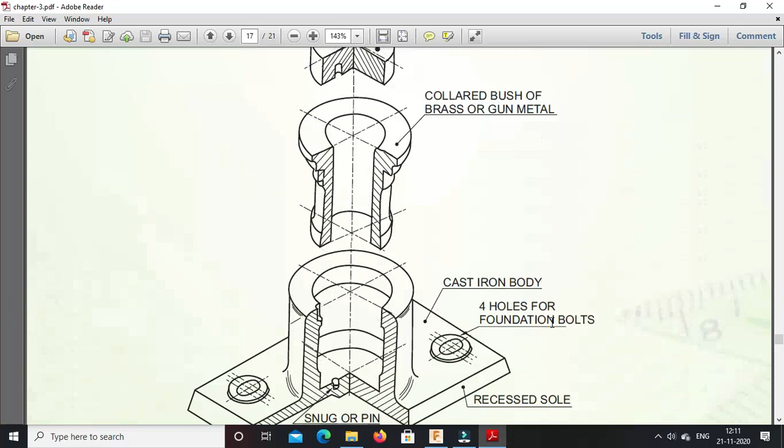So this is the assembly or parts of the footstep bearing. Now in this, if you observe all the parts, this one is the shaft. Generally this shaft will have rotational motion around its vertical axis. So this shaft will be rotating clockwise or anti-clockwise about its vertical axis, and this shaft will also have some axial load. That means this shaft will have axial thrust along its axis.

Now in order to support this shaft, this bearing is used. Okay, so this first part, this second part and this third part are parts of the bearing, and this shaft will be inserted into this bearing for support. Whenever the assembly is carried out, all these three parts will be assembled together to form a bearing, and then this shaft will be inserted into this bearing for support.

Now, how the assembly will look: this part is called the base plate, or body of the bearing. Into this body, the second part, which is called a bush, will get fitted, and finally there is one pad or disc. This disc or pad will get fitted in between this body and bush. And finally the shaft will be inserted. The shaft will be rotating, the bottom of this shaft will be resting on this pad, and the rotational motion will be supported by the bush.

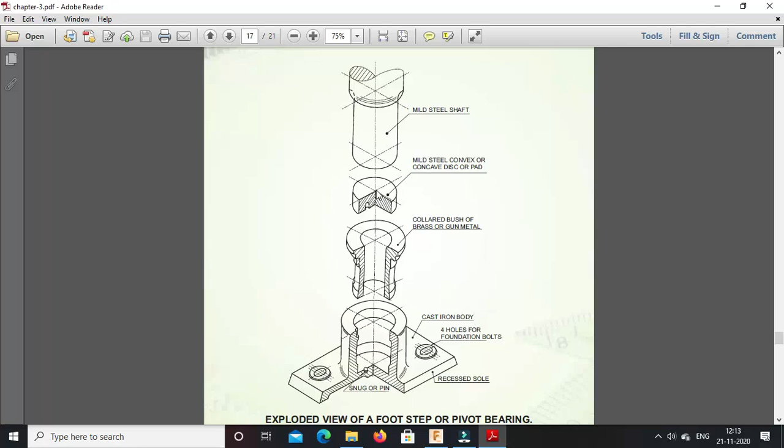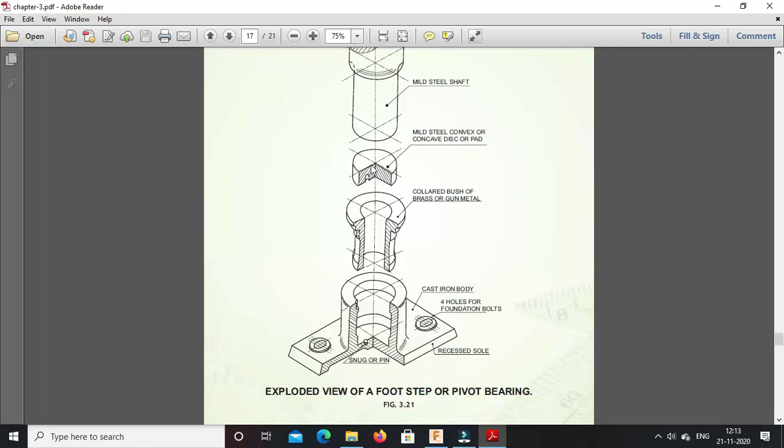If you observe the assembly, there is one small arrangement. Whenever the end of this shaft rests on the disc, in order to prevent rotation of the disc, one small arrangement is made to connect this pad with the body. Okay, so I will try to zoom in. If you observe, one small hole is provided in this pad, and in the body a similar small hole is provided, which is called a snug or pin inside the body.

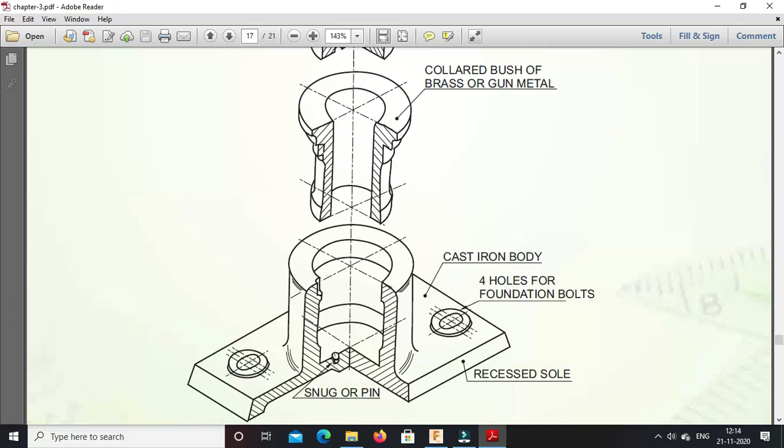So whenever this pad and body are assembled, that means this pad is placed in this body, one small cylindrical pin will be used, with half of that pin inside the body and half in the disc. So it will join them together and prevent the rotation of this pad along with the shaft.

Now if you observe the assembly, this is the assembly. Whenever all parts are combined together, the assembly will look like this. So this is the shaft. This hatched portion is the sectional view of the bush. Then this half portion is the disc or pad that I have explained. Then this pin or snug will be used to join that pad with the body in order to prevent its rotation, and this is the body.

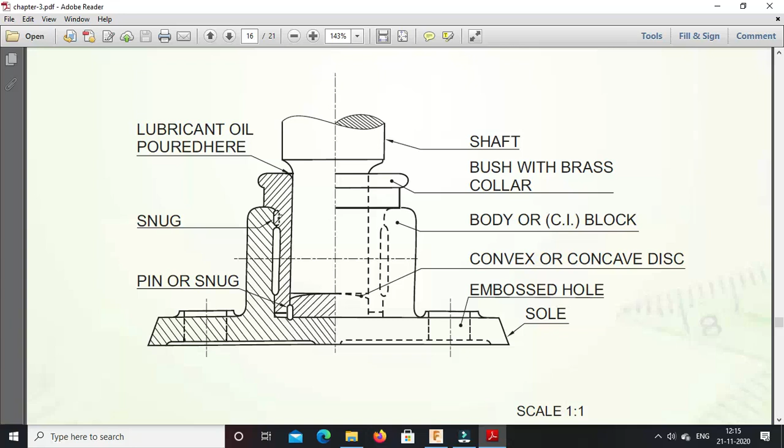Now one more small snug is provided, which is like a keyway. One extension will be provided on this bush. This is the bush, so one extension will be provided on this bush, and similar to a keyway, one small arrangement will be made in this body. So again I will try to zoom in.

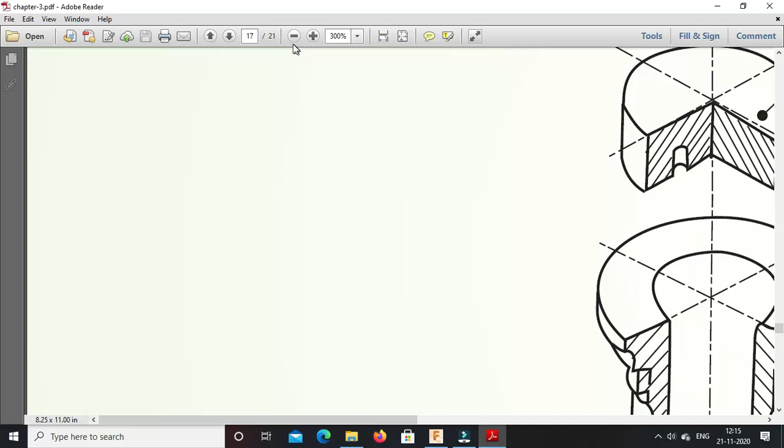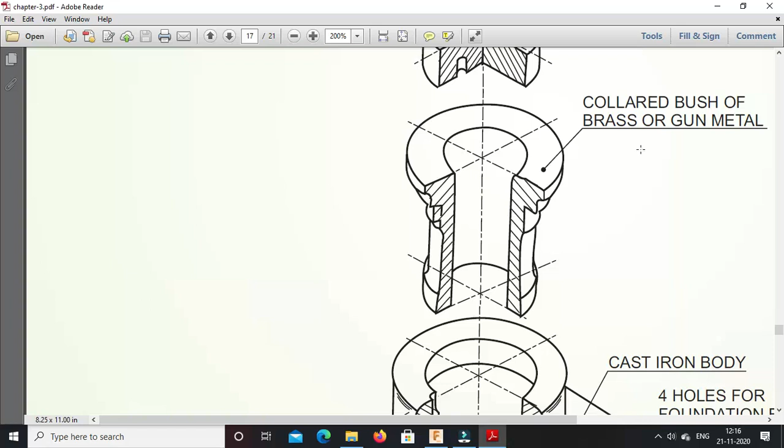If you observe here, there is one small keyway-like hole in this body, and if you observe carefully, this is a sectional part and this is also a sectional part, but there is one additional part here. The curve is like this and the same curve is like this, but this small portion is the extension. So it is similar to a key. This extension provided on the bush will fit into this cavity drilled inside the body, and it will prevent rotation of the bush along with the shaft. So these are the parts of the footstep bearing.

Now I will show you the individual part drawings for the footstep bearing. So this is the part drawing for all the parts.

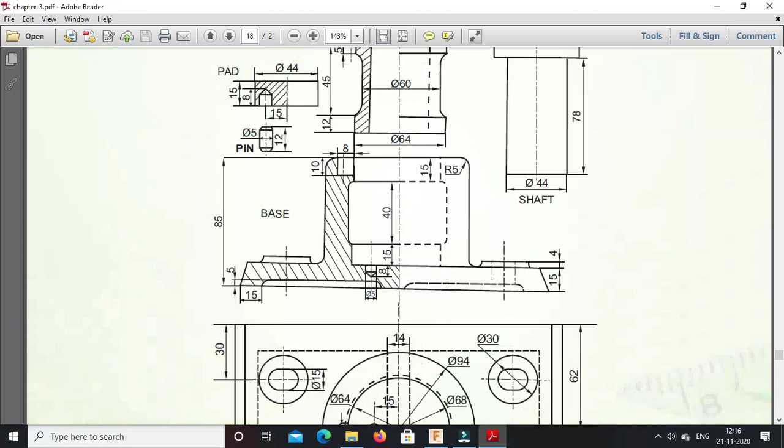Now the first main part is the body. So this one is the body; half part is sectional and the remaining is the regular front view. Then this is the top view for the body; different dimensions are given. Then this part is the bush, the central part, so half part is again a sectional view.

Then this one is the disc or pad. Then another part, which is the pin, which is used to connect this pad along with the body, and the last part is the shaft. So we will try to prepare these actual 3D parts on Fusion 360 software. So we'll go to Fusion 360 software.

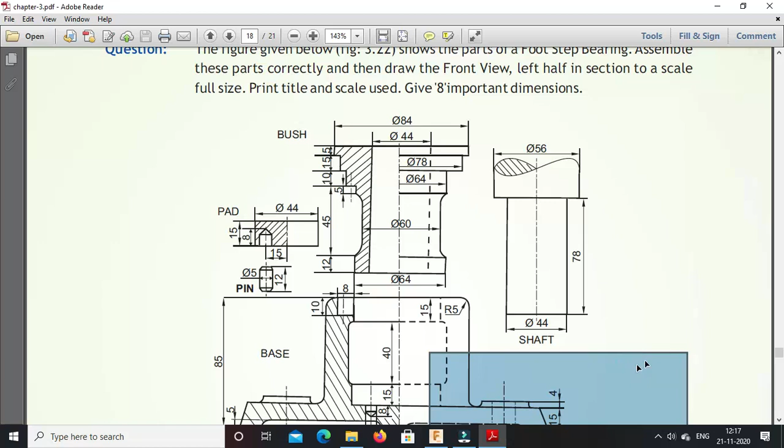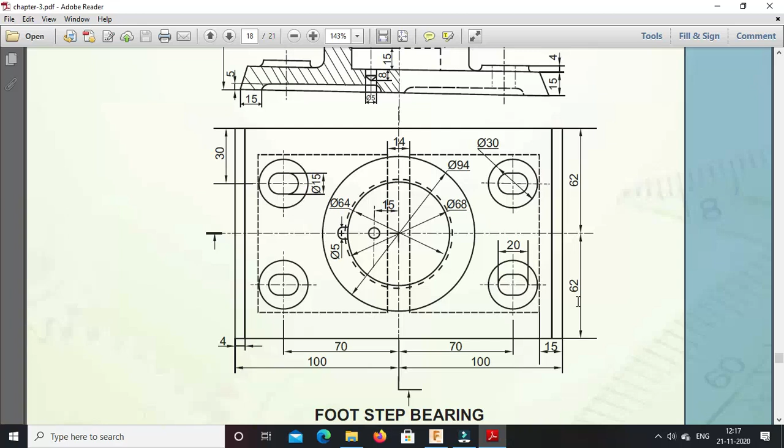Now we will start with the body. If you observe the body, initially at the base there is a rectangular plate. Total length is 100 plus 100, 200, and this is 62, and on the other side also 62. So first we need to create one rectangular plate of length 200, width 124 mm, and height 15.

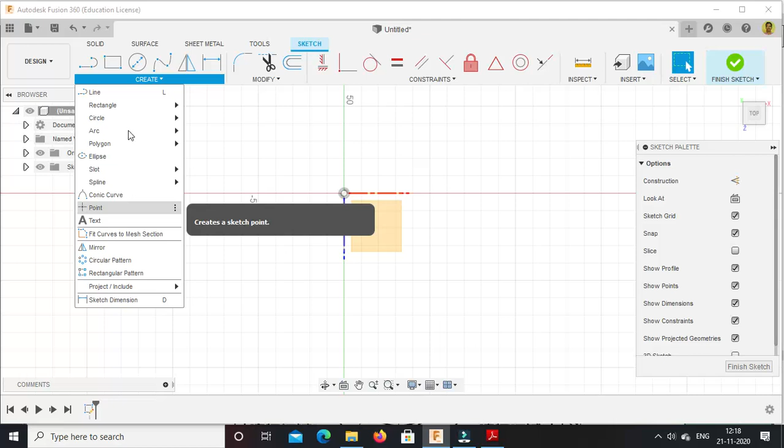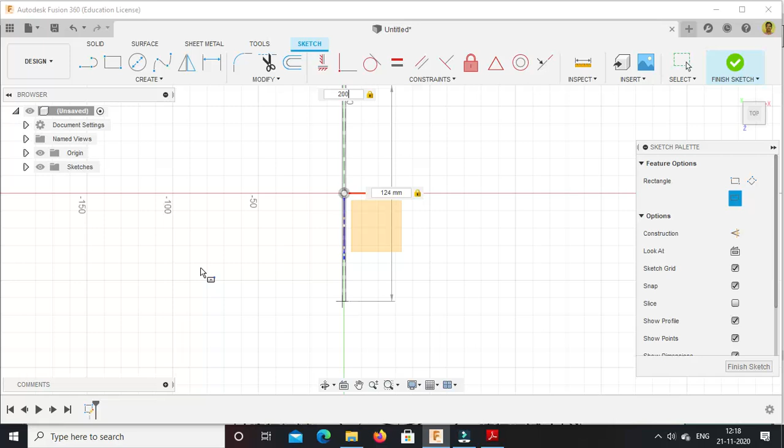Now the plate is horizontal as per the orientation, so we will select this plane, right click on it, go to create sketch mode. Now select the center rectangle option for drawing a rectangle. Center rectangle, select this center, drag it, width is 124, press tab, length is 200, press enter, finish the sketch mode.

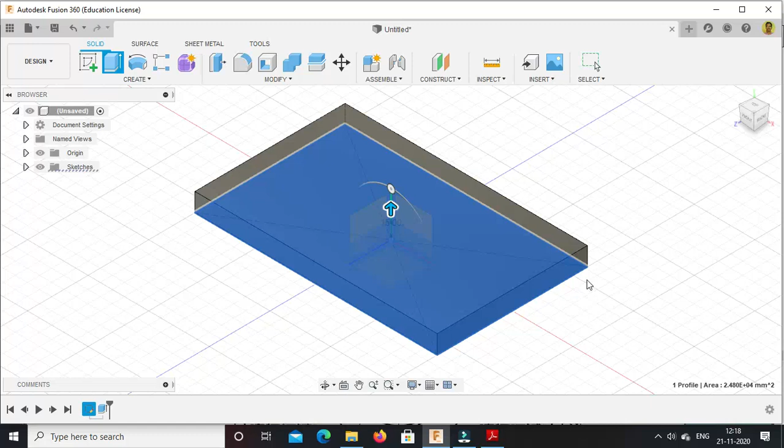Now extrude this in order to create a plate. Height is how much? 15 mm. Press enter. So this base plate is created. Now next we want to,

if you observe, this much portion is removed from the base. The thickness of this is 5 mm, and the width from this side is 15. These are minute details, so I will not go with the exact dimensions. I will show you how to prepare this. From the bottom side of this plate some material is removed, thickness for which is 5 mm. So I will show you how to create that on Fusion 360.

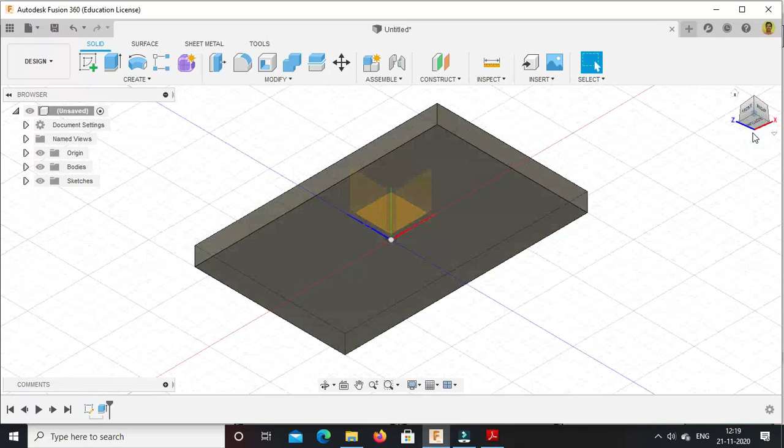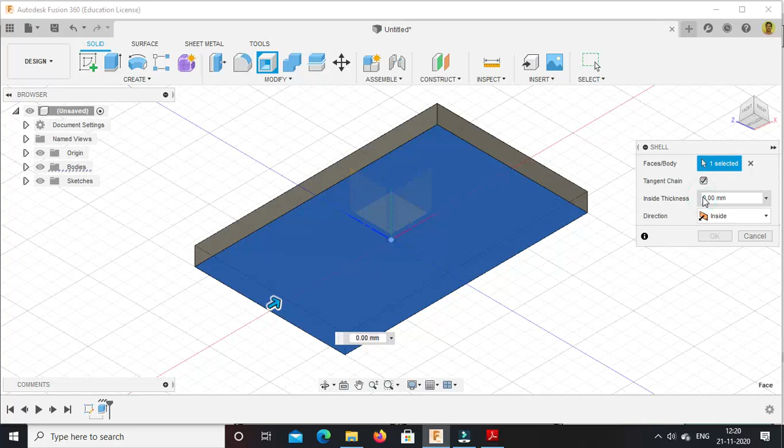You can create it using the extrude cut option also, but I will show you another option. Go to modify, go to the shell command. Now select this face and enter the thickness. Suppose the total thickness of the plate is 15 mm. So enter 10 here, and we will get the remaining 5 as thickness. Direction is inside, so keep it as it is.

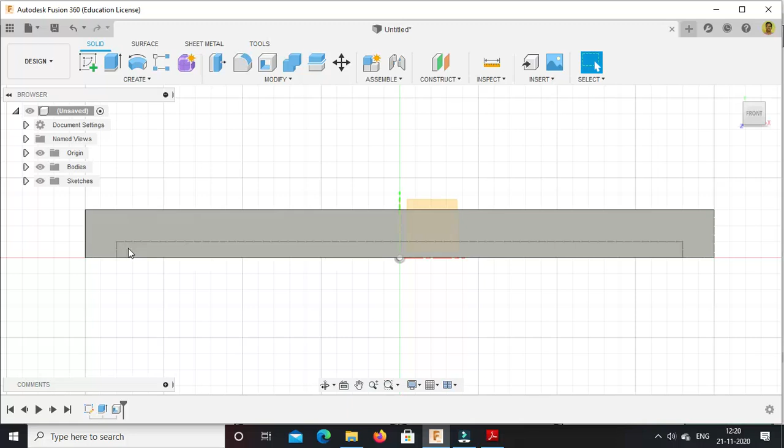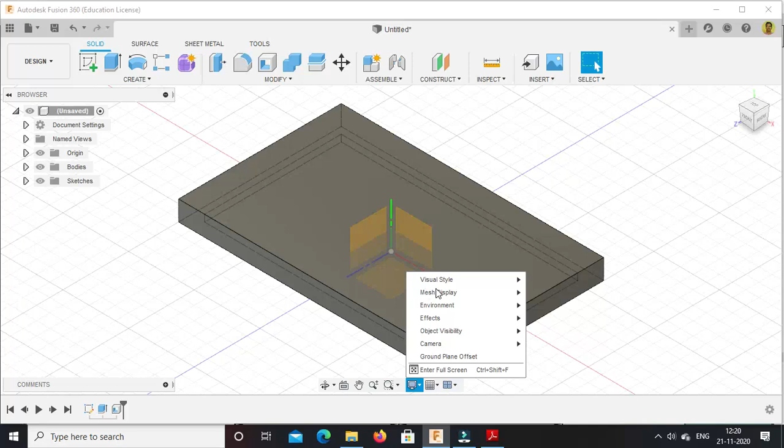Press OK. So now if you observe, this much material from the base of this plate is removed, or a cavity is made below it. Now I will change how to visualize this plate. Visual style is over here, shaded with visible edges only. Now if you observe, some small portion is removed, so that's why this step appears.

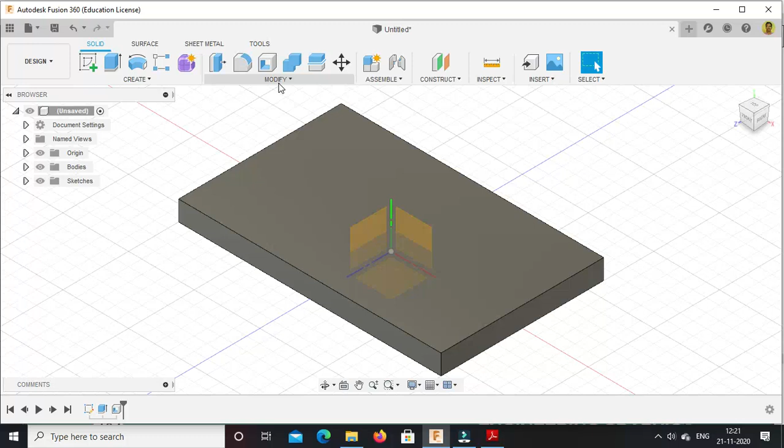Now again, if you observe the base plate, the thickness of the plate is not constant; these edges are different. In order to create this, we can provide a draft. I will show you how to use the draft option. Here the thickness is given as 4 mm as per the requirement, but I will show you how to provide draft. Go to the draft option in modify.

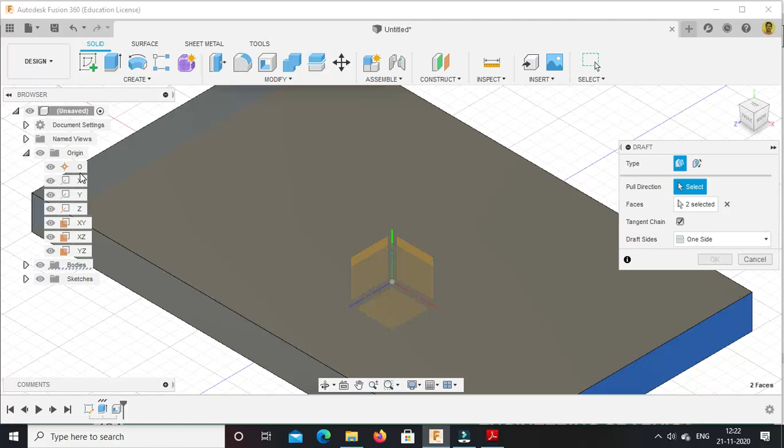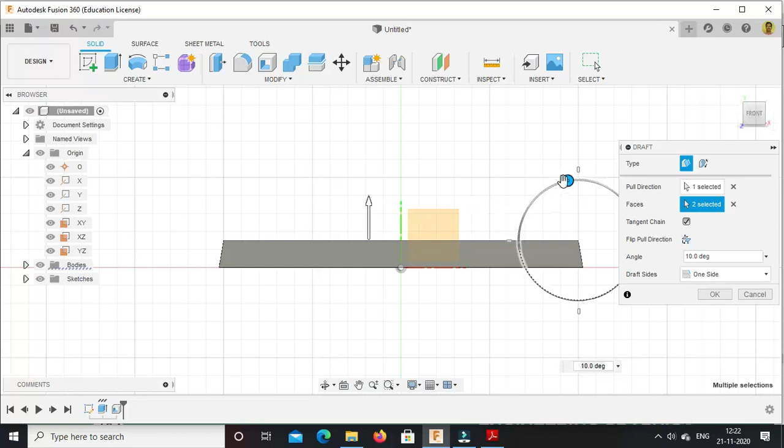Now select the faces. This one, press Ctrl, select the other face also. Now for pull direction, select this vertical direction and give the angle. Instead of giving actual dimensions I am giving some arbitrary value because it is a minute detail. I think this much is sufficient. Press OK. So this is the angle, and the draft is provided on this plate.

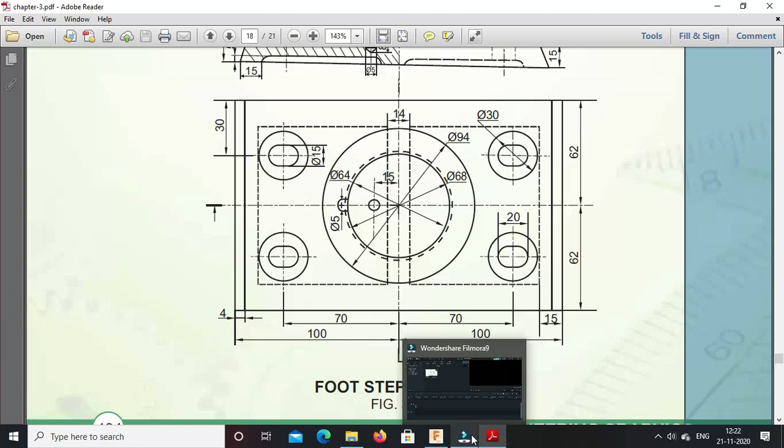Now, sorry, next we want to prepare this central cylindrical portion. If you observe the isometric view, there is one cylindrical portion; the outside thickness is constant, but the inside diameter is not constant. Here it is this much, then it increases, then again it reduces.

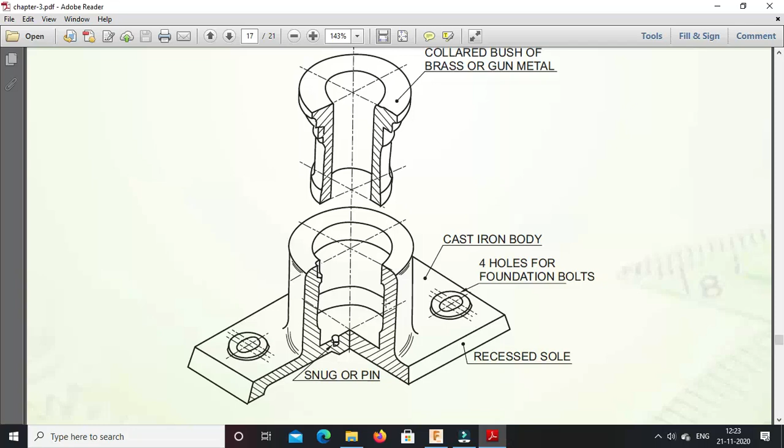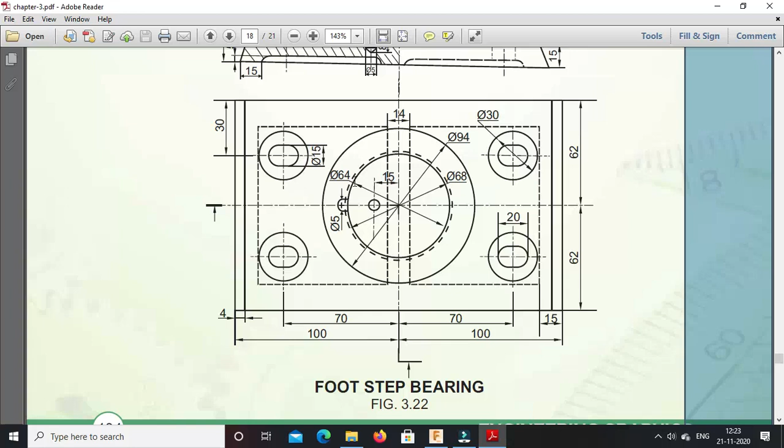If you observe the actual dimensions, initially the outside diameter is 94 and the inside diameter is 68 and 64. So in between the diameter is 68, that means this large diameter is 68 and this diameter is 64.

Now in order to prepare this shape, either you can draw this cross section, whatever hatch portion you are observing, and revolve it using the revolve option, or you can use 3 steps using the extrude feature in order to create each cross section. So I will show you for simplicity how to use the extrude option.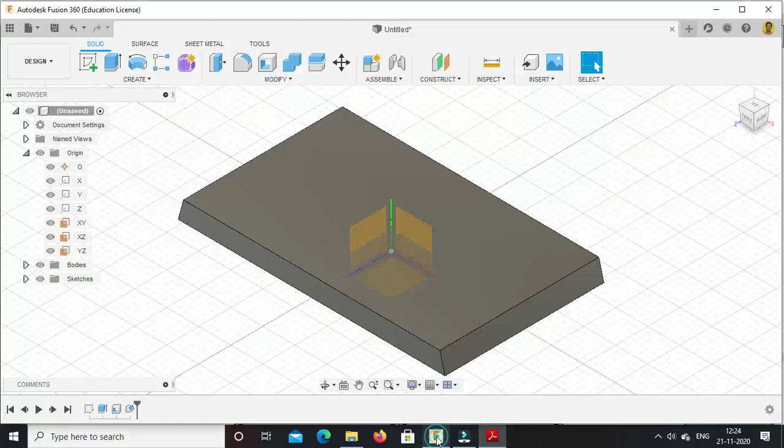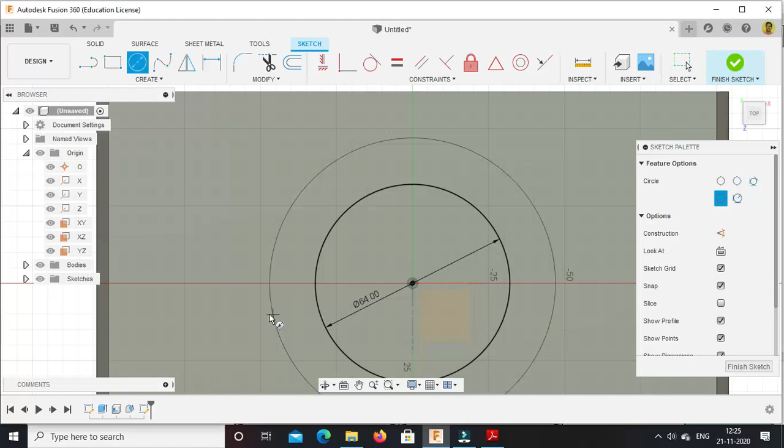Okay, so inside diameter is initially 64, then outside diameter is 94 and this thickness is 15. Okay, so again use this face, go to create sketch option, select center diameter circle as option, select this center point, draw a circle of diameter 64 mm, press enter. Again center diameter circle, diameter as 94, press enter, finish this sketch mode.

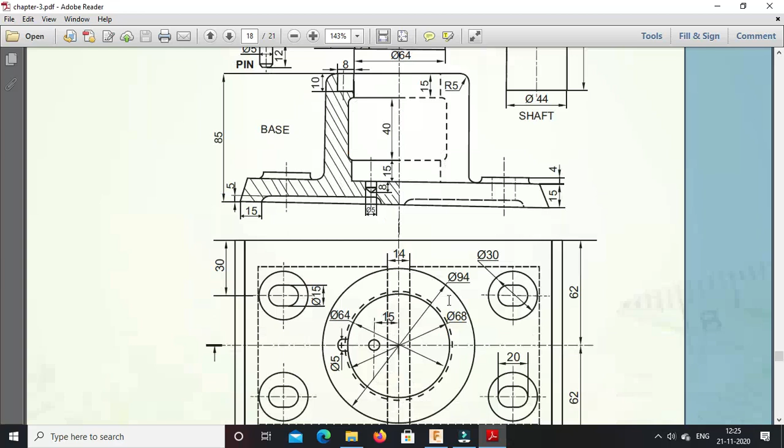Now using the extrude option, distance as 15 mm, press enter. Okay, so the initial portion we have created. Now the next portion is this much, that means the diameter is increasing now to 68 and the outside diameter is constant, that is 94, and height is 40. Okay, so 68 inside diameter, outside 94 and height is 40.

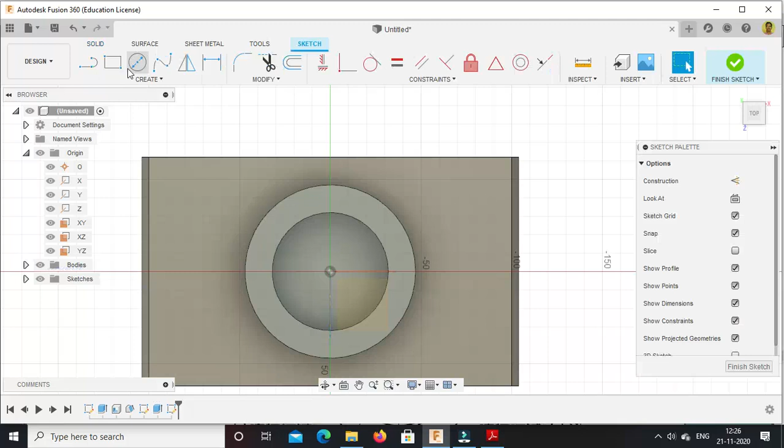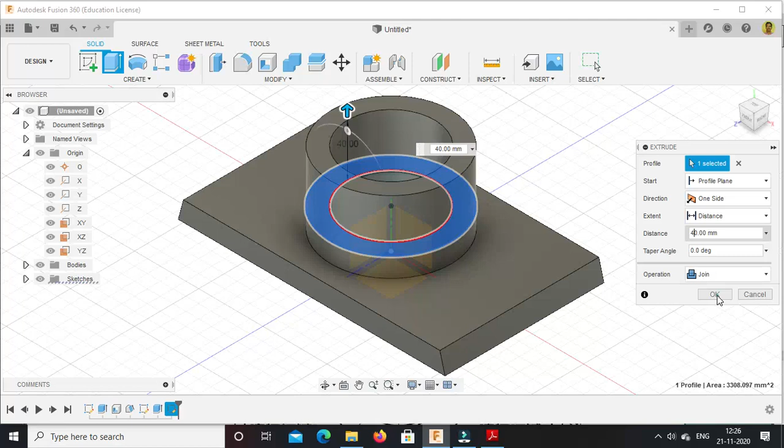Okay, so again we will select this plane or this face, go to create sketch, again repeat the same circle, only the dimension is changing, 68, press enter. Or directly you can finish this sketch, extrude, this distance is 40, press enter. Okay.

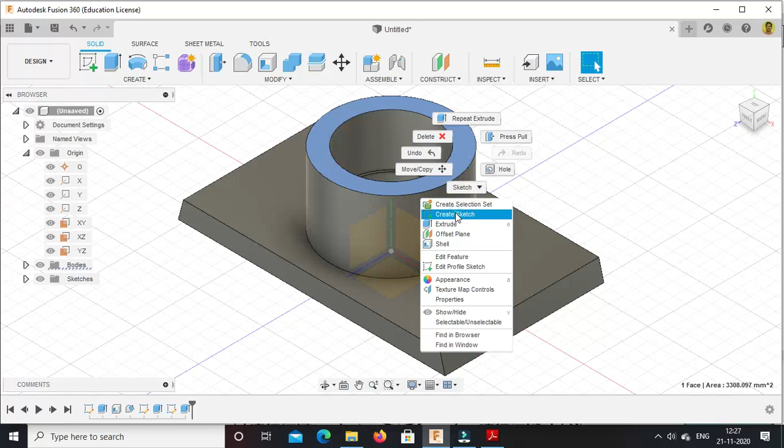Now the last portion is, again the diameter is now 64 and the remaining height is 15. Okay, and the outside diameter is constant as 94. Okay, so 64, 94 and height is 15. Press enter. Again you need to draw 94, enter. Finish this sketch mode.

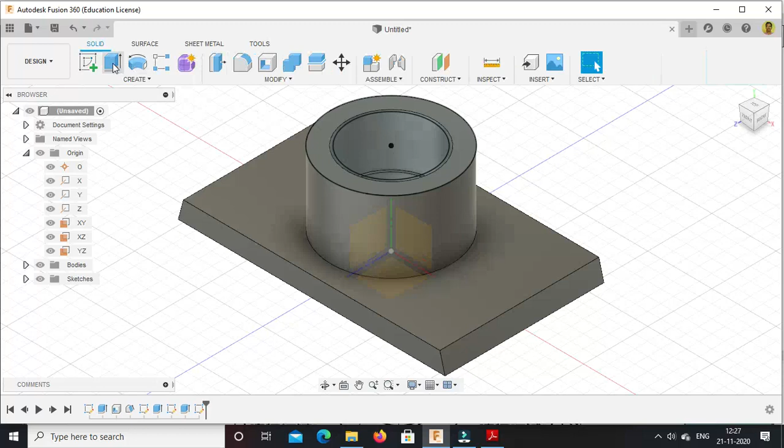Now while using the extrude option, make sure that you are selecting both the portions, outside and inside, otherwise the inside diameter will remain as 68 only. Give your distance as 15 mm. Press enter. Okay, so if you observe, I will show you using this option again, visual style I will change.

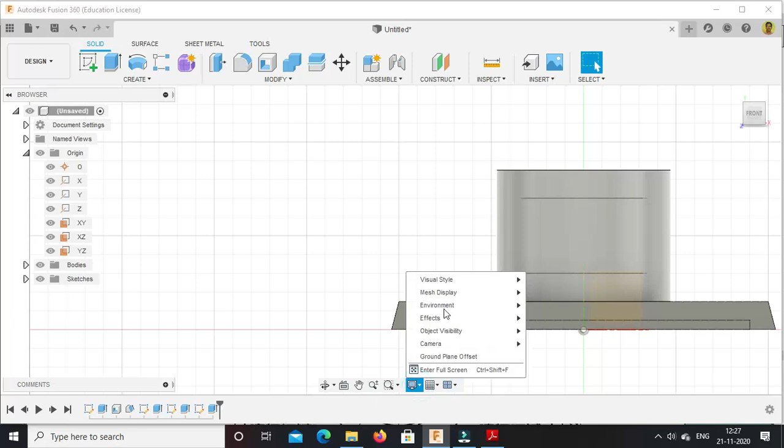Okay, so if you observe, it is not clearly visible. So if you observe over here, 3 steps are created. Okay, this one is one, the center portion is different and the final portion is different. Okay, now again I will change the style over here.

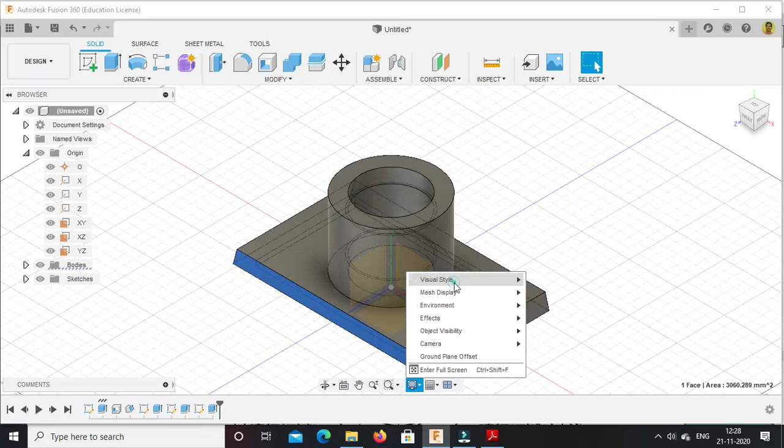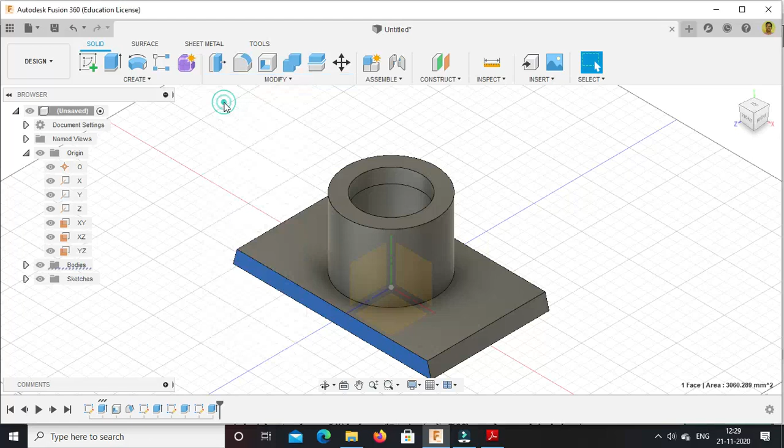Now what is remaining? Need to fillet this corner or circular edge, sharp edge, by R5. So go to fillet, constant radius, select the edge, this edge, and radius is 5. Okay, so we have filleted this circular edge.

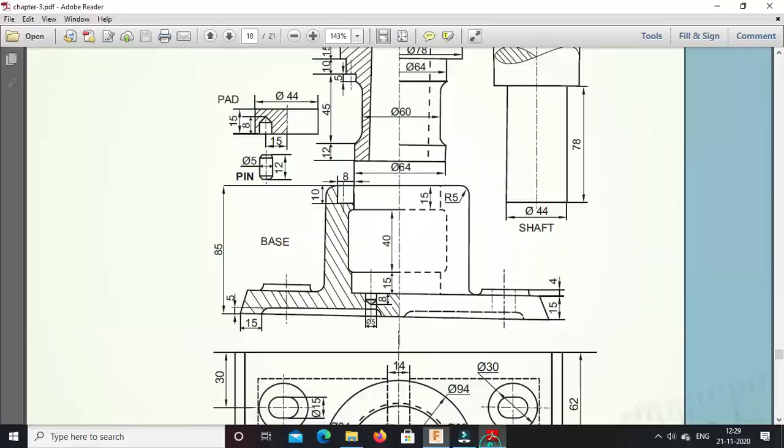Now the next one is, we need to drill holes. Okay, so we will drill one hole and using the mirror feature we can repeat the same hole on the other side. So how is the hole created? This much is 15, width is 15 and length is 20. Okay, so directly we will use one option for creating this hole. Length is 20 and width is 15.

Okay, so first of all we need to place the center. So for that purpose, this one is 30, from this side 30, and this distance will be mentioned over here somewhere. From the center portion it is 70. Okay, so 100 minus 70, this will be 30. So 30 by 30.

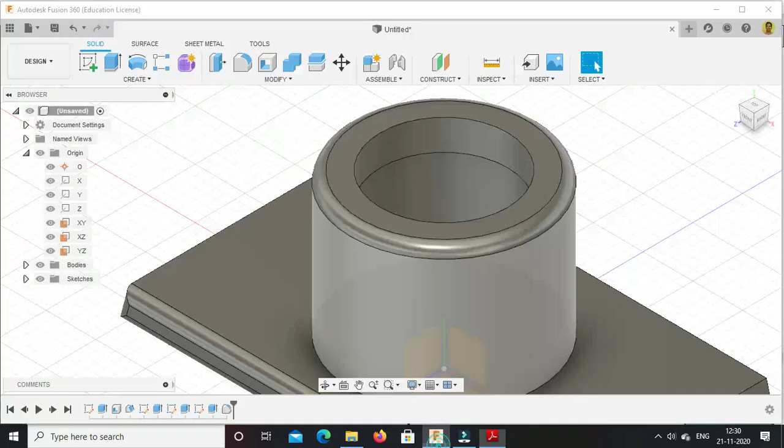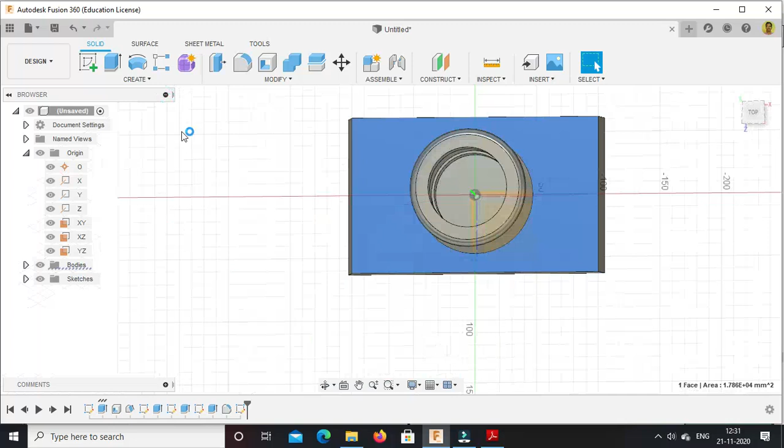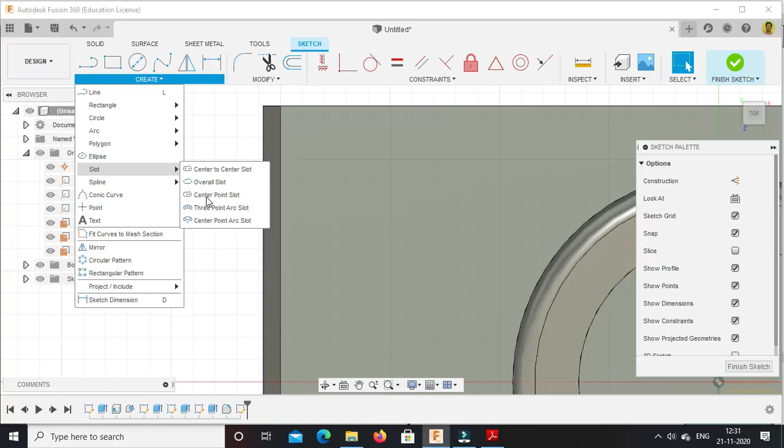So again select, I think I provided a fillet for this edge also, so I will remove it. Only fillet this circular edge. Now use this face, go to create sketch option again. Now place one point over here. Center point slot is also available there. So here I will place it.

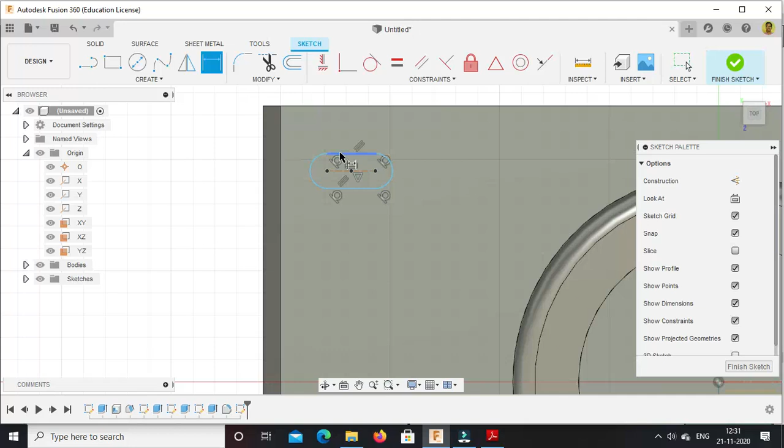Like this I will create the slot. Okay, now I will give dimensions to it. This should be 15, and 20 is how much? This much, end to end, is 20.

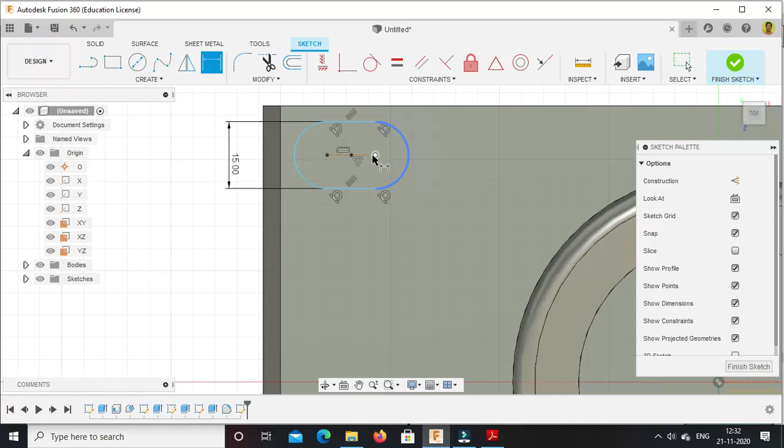So suppose this is 15, so this radius is 7.5. Okay, so 7.5 will go on from both the sides, so this total radius will be 15, so the distance between these 2 points will be 5 only. So just using dimensions I will adjust that distance as 5 mm.

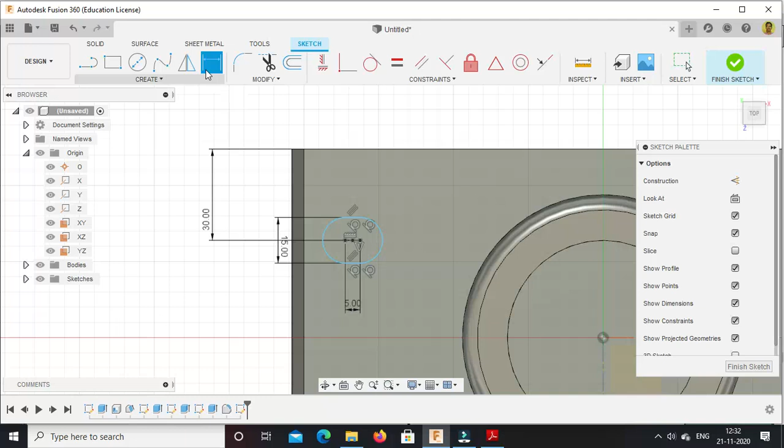Okay, now we will place the slot from all the sides. From this edge to this center point the distance is 30. Press enter. Then again from this edge to the center the distance is 30. Press enter. Okay, so we understood how I created this slot using the slot option. Over here I have created a center point slot.

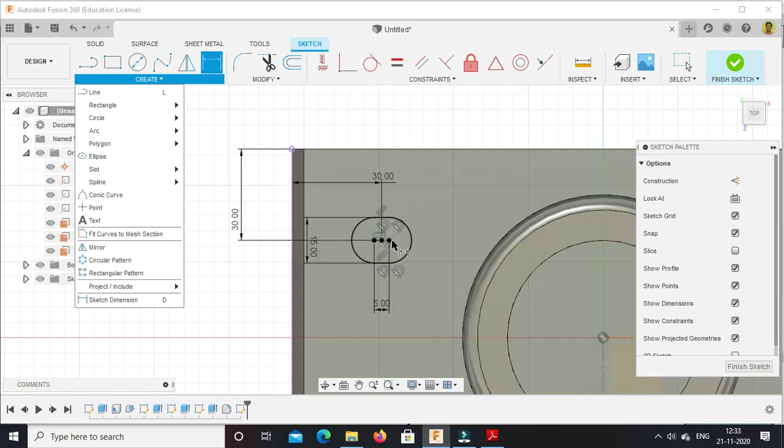Okay, so I have initially drawn one slot, then using the dimension option I have given width and length to this slot, and then using the center point I have given dimensions to that center. So that slot will get located at 30 mm from this side and 30 mm from this side. Okay, now we will cut that hole. Finish this sketch mode.

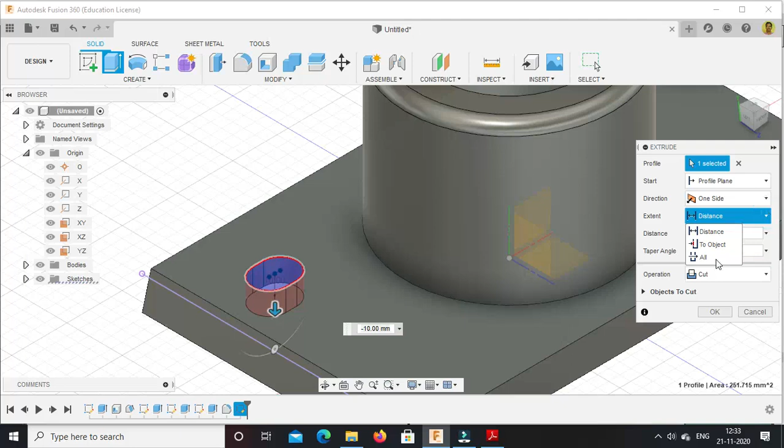Using the extrude cut option we will cut this hole, reverse the direction of the cut operation, and cut all throughout the base plate. Press OK. So this hole is cut.

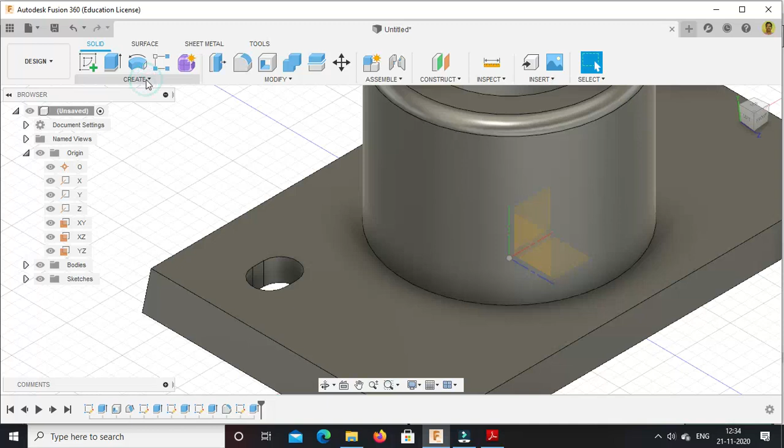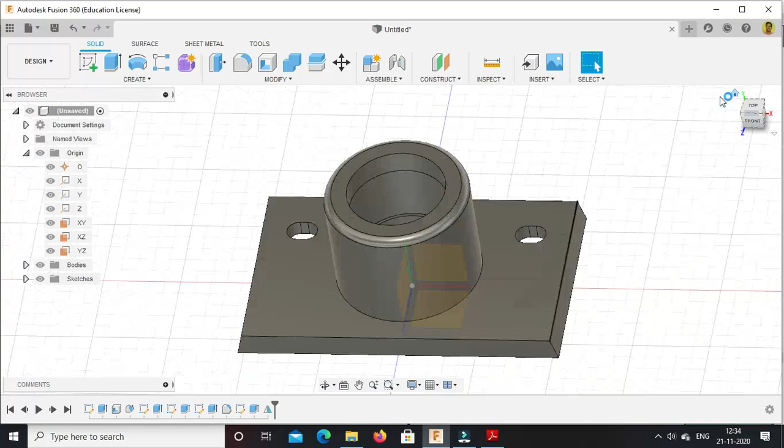Now we want similar holes on all 4 corners. Instead of drawing the slot again and using extrude cut, I will make use of the mirror feature. Go to the mirror option, select feature, then select the object from the timeline, use this extrude cut, select the mirror plane, and press OK. So again using this option I have created this.

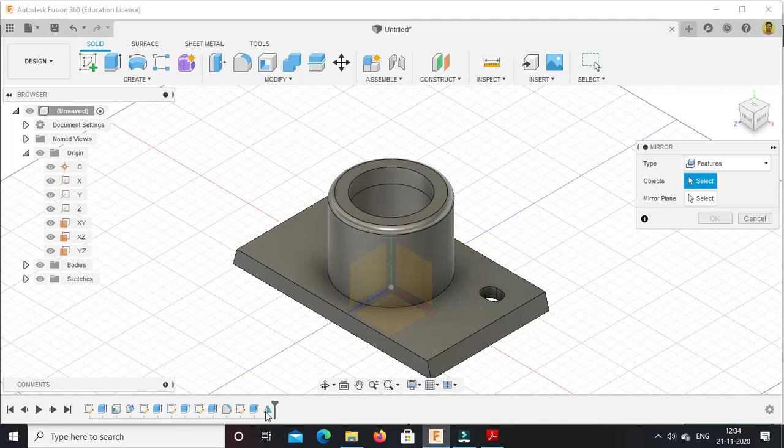Now for creating holes on this side, I will use these 2 holes and select this as the mirror plane. Go to mirror option, features, objects. On the timeline I have selected this hole and this hole. These are blue, so these are selected. Then select the mirror plane, this is my mirror plane, and press OK. So I have created all 4 holes.

Now there is one thing that is not necessary, it is minute, but I will show you. On the outside there is one circle that is 30 diameter, and that much portion is extruded. So this 30 diameter, again I will show you.

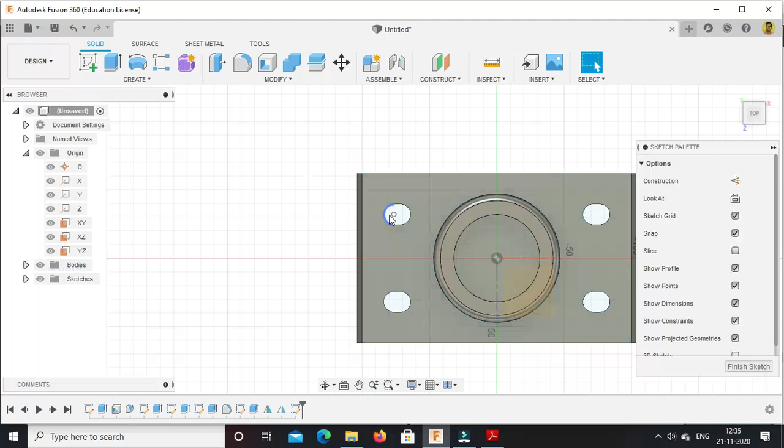Select this, create sketch, using center diameter circle. Press enter. Finish the sketch mode.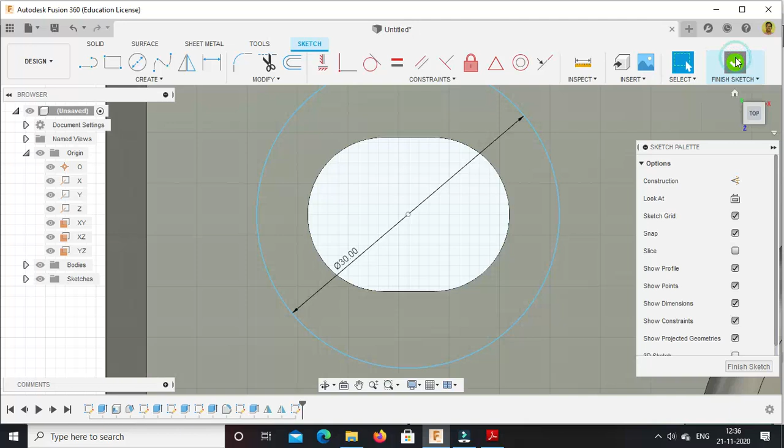Now using extrude, select this, and what is the thickness for it. This is 4 over here, 4. So I will give the dimension as 4.

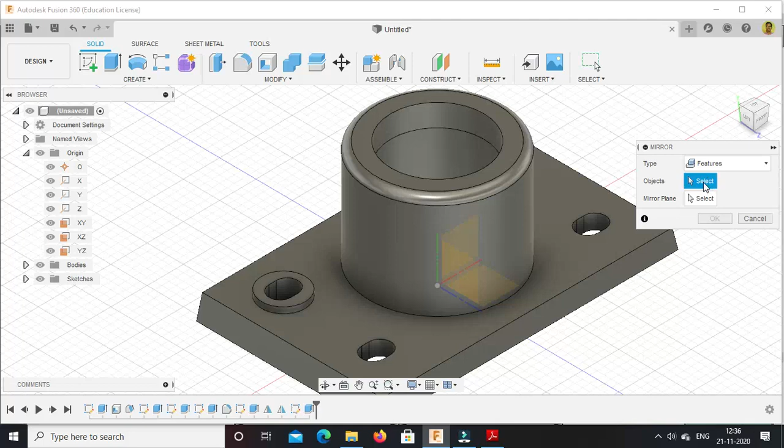Press enter. Okay, so you can again use the mirror option to create this on all sides. Mirror, features, object, select from the timeline this recent extrude, then select the mirror plane, this one, press OK.

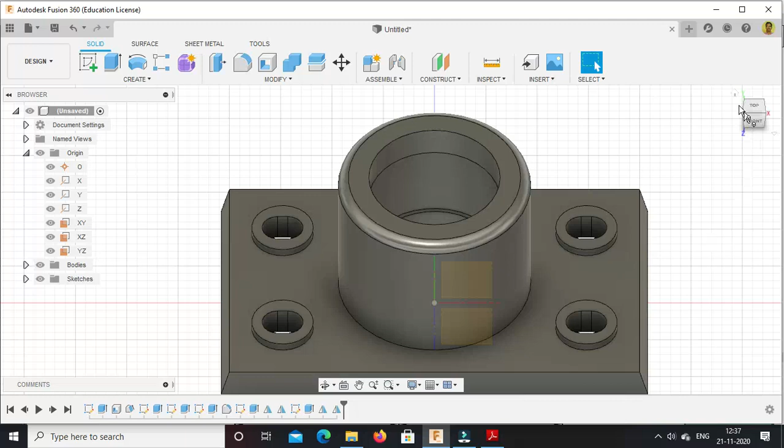So on this side, using these two I can create the mirror for the remaining holes, same feature for the remaining holes. Select from the timeline objects this one and this one, mirror plane this one, and press OK. So you have created one hole.

Now the last part which is remaining is you need to cut one recess. You want one recess, and its diameter is 5 over here.

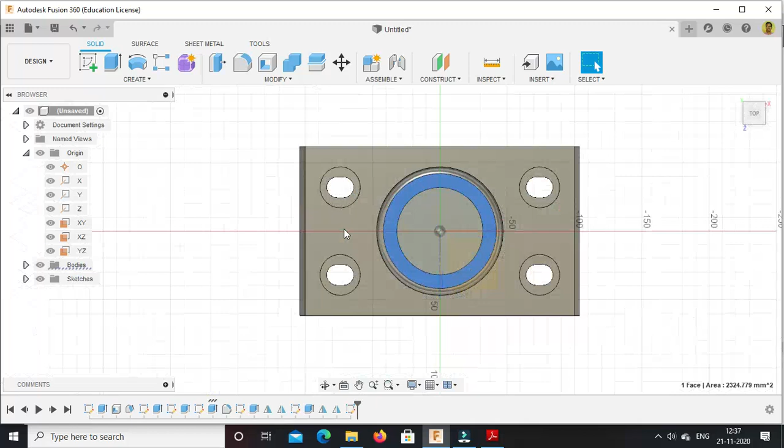Go to this, select this face, go to create sketch option. Again on this point we will draw one half circle, diameter as 5. Finish the sketch. And how much thickness is required?

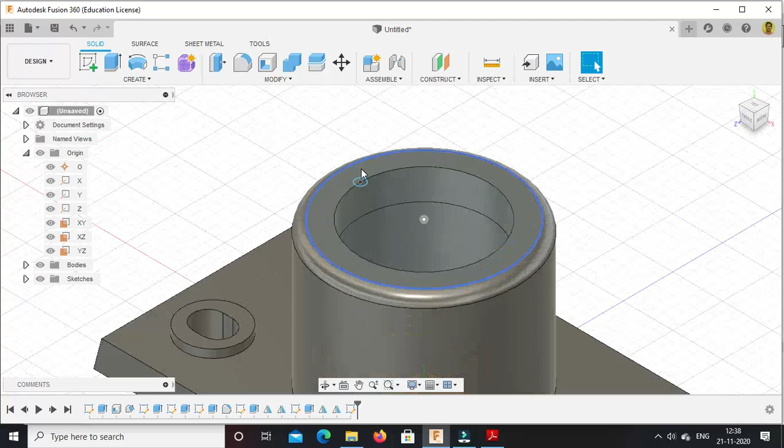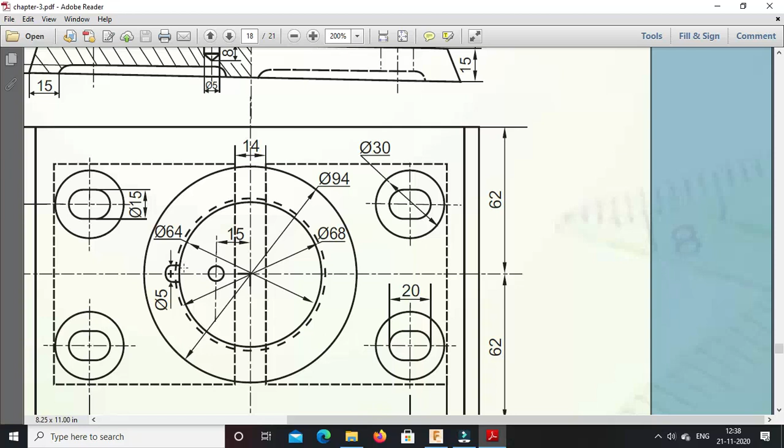This is 10. So you can keep this dimension as it is. This total distance they have mentioned is 8, so you can shift this circle from this point by distance 3 mm, or by a distance of... I think this diameter is 5, so the distance radius will be 2.5. So 8 minus 2.5, that's how you can shift the circle, but I am currently using only 5 as the dimension, and height is 10. So it's just for showing or locking purposes.

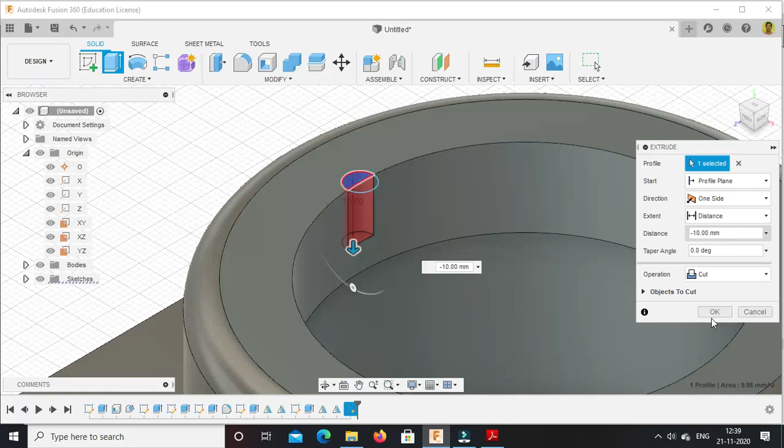Cut this for the distance of 10. Created. Now what is remaining?

Only we need to drill another hole for that pad for fitting. That is diameter 5 again, height is 8, and it is located 15 mm from the center. Diameter is 5, length is 8.

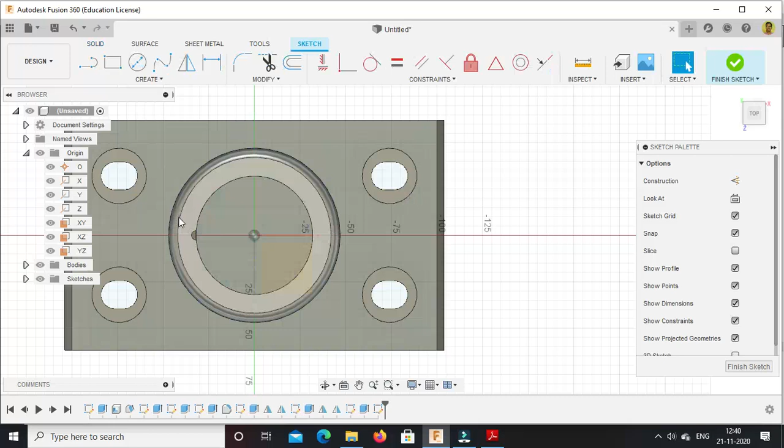So again now we need to select this plane, create sketch option. Now draw one circle over here of diameter 5 mm. Press enter. Dimension from this point, this distance is 15 mm. Press enter. Finish the sketch mode.

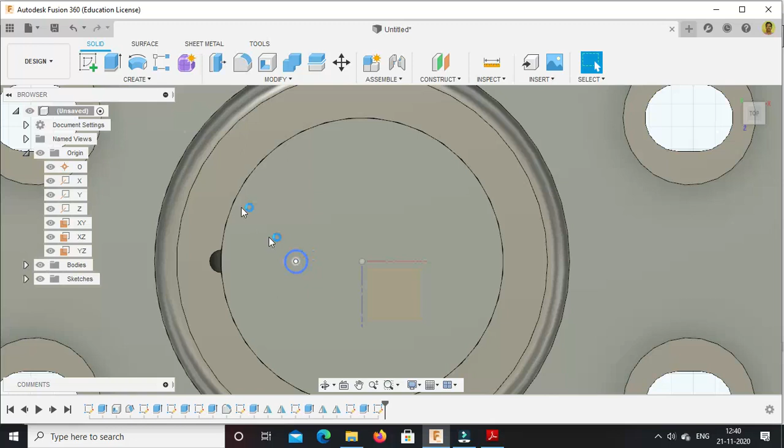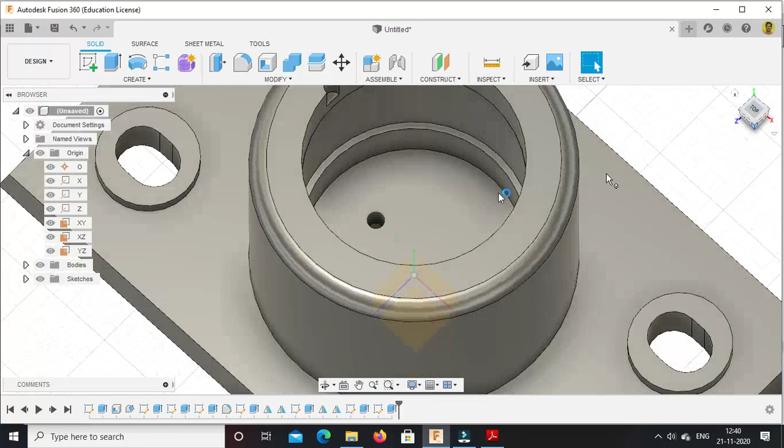Go to extrude, select this as the cross section, reverse the direction, and the height required is -8. So we have drilled one hole over here. If you observe, this hole we have drilled for fitting the pin.

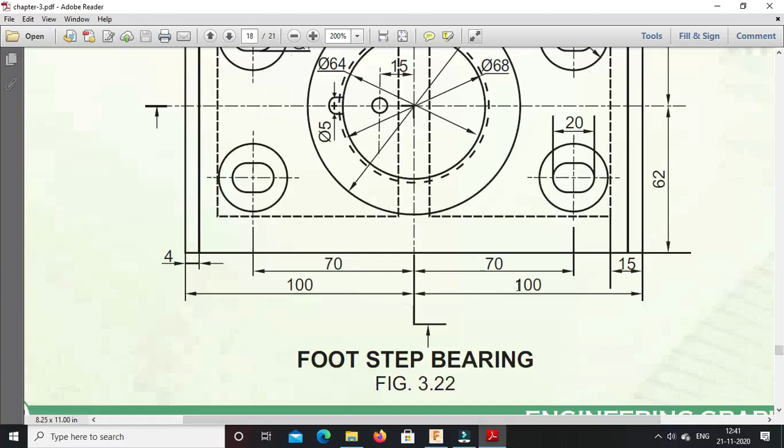So with this we have completed this body part. We have covered all the minute features of this body part. In the next video I will show you how to create all the other parts, that means shaft, bush, pad and pin. Thank you.